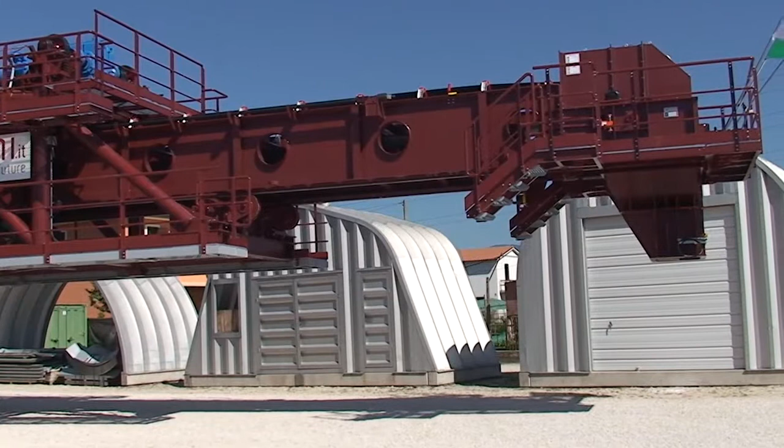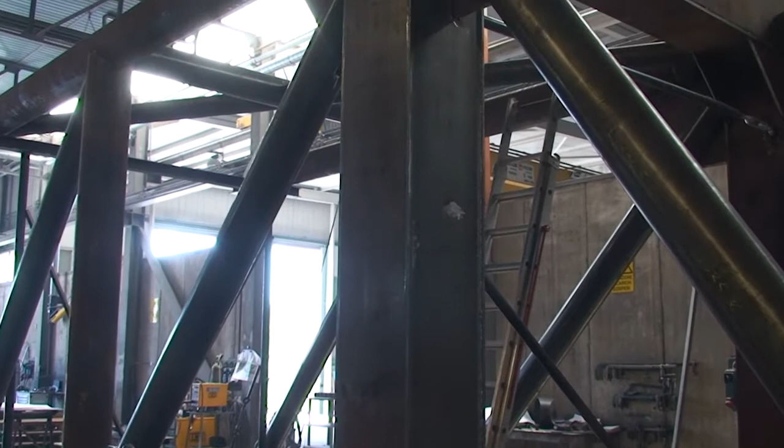Sammi's know-how can be seen in its ability of facing increasingly complex challenges, such as the Bulk Kremi project, created with Coeclerici Logistics and entirely designed and made by Sammi at its headquarters in Narni Scalo. The particularity of this plant is that of being the first in the world suitable for transshipment operations of bulk sulfur with conveyor belts.

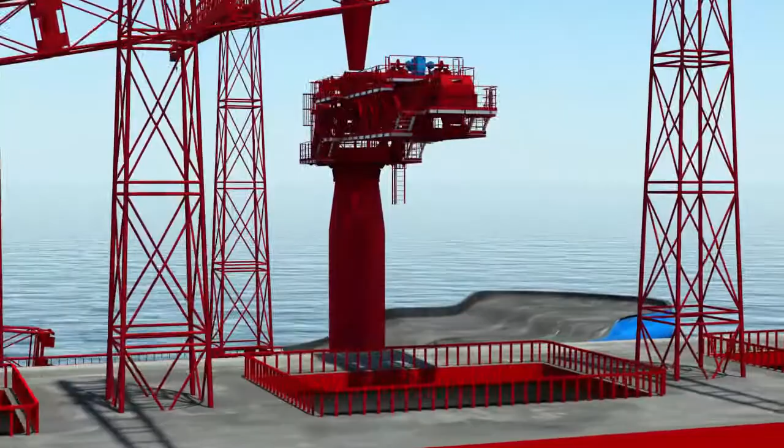The technological heart of the Bulk Kremi project is the innovative ship loader, the first of its kind able to carry out movements and performances which allowed the loading of any kind of ship, from small crane ships to Panamax, with significant reduction in transshipment times and respecting environmental regulations.

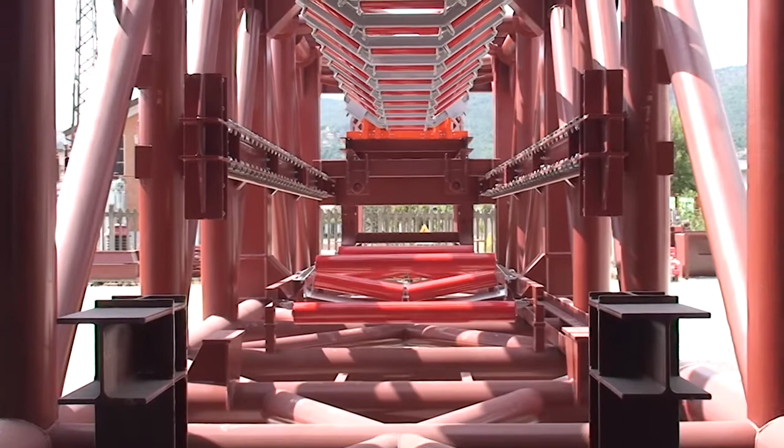The company's technical laboratory, in collaboration with specialized partner companies, engineered the entire mechanical, hydraulic and electrical parts of the plant. The ship loader in particular was analyzed in all its complexity, a unique machine of its kind that summarizes the high technological level the company has attained.

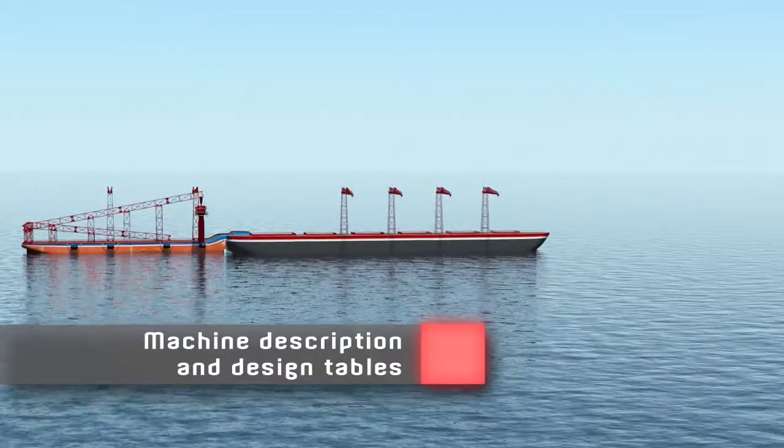The ship loader, or continuous loading machine of material transshipped directly to the hulls of bulk cargo carriers, ships that can transport non-liquid and non-unitarized loads in containers or pallets, is the heart as well as the jewel in the crown of a larger conveyor plant made by Sammi Limited to be installed on one of those commonly called OFTs, offshore floating terminal, ships or platforms used to transship material inside the merchant ships which carry to destination.

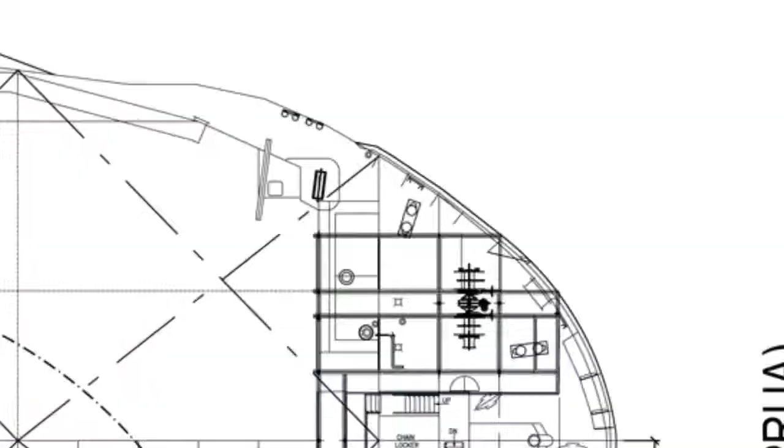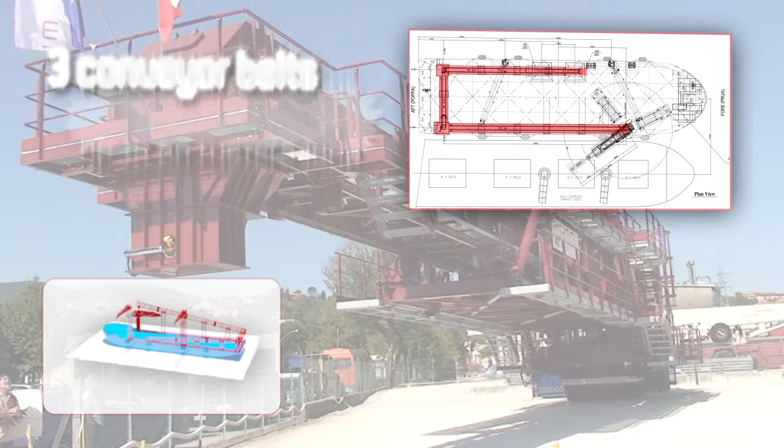The complete plant is made up of 2 loading hoppers, 2 extractor belts and 3 conveyor belts up to 60 meters long, and the ship loader. Credit goes to Sami to have entirely created, designed and built the plant at its workshop in Narni Scalo, from where it was then sent to its final destination in Ukraine.

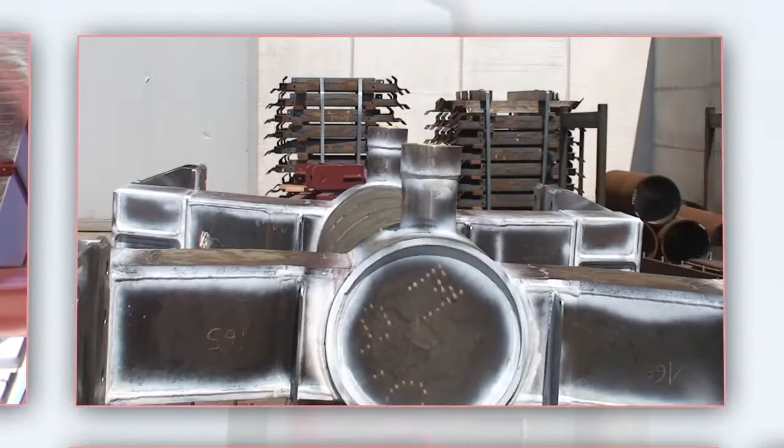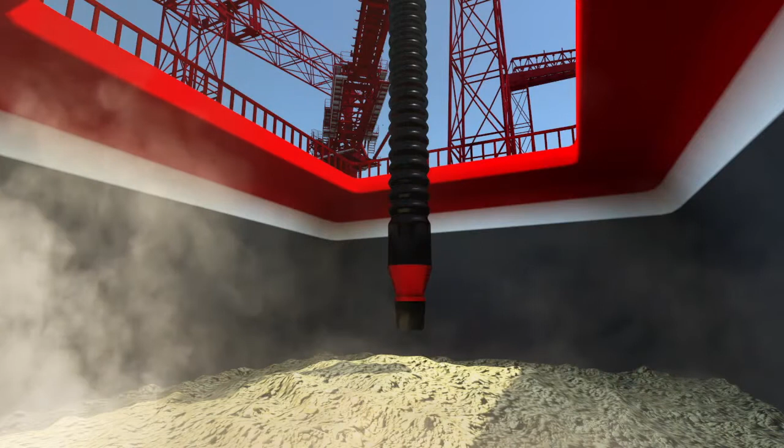What is special about this plant is that it is the first plant in the world suitable for the offshore transshipment of pelletized sulfur, a highly inflammable material due to its dusts, the installation of which comes under the European ATEX regulations. The ship loader, weighing a total of 100 tons, has 3 main functions, allowing it to reach any corner of the hulls of merchant ships up to 80,000 registered tons.

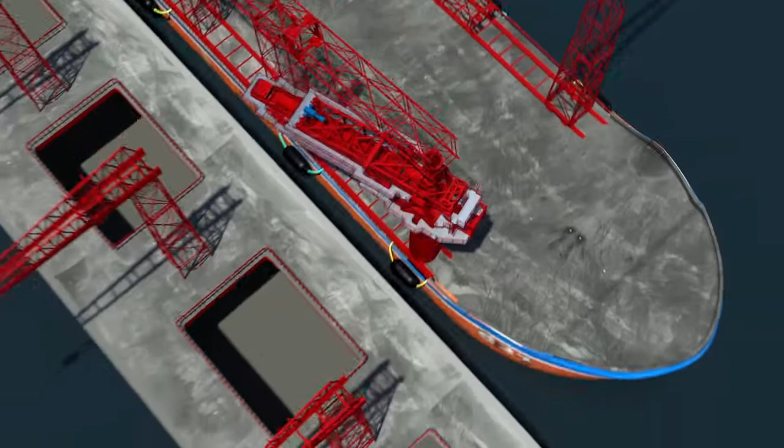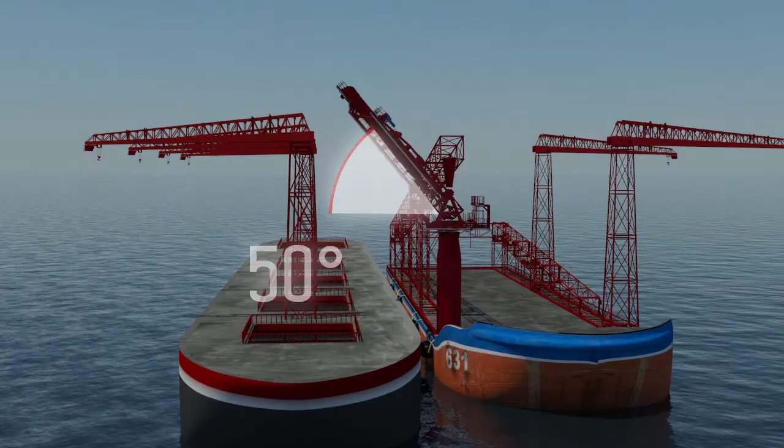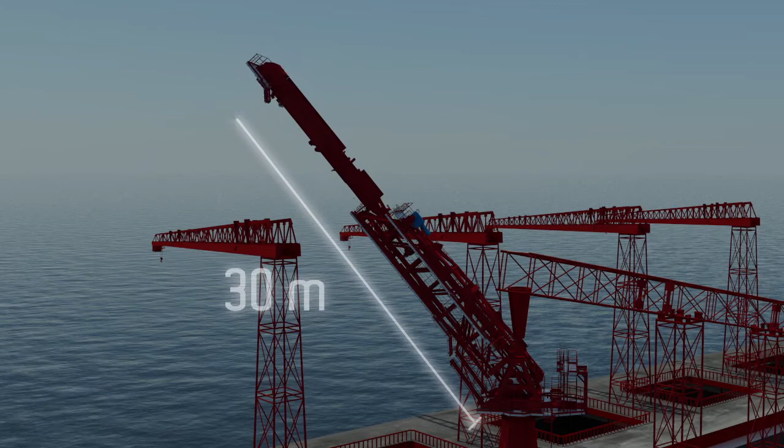It can rotate in plan as far as covering a 270 degree angle, lift its main jib to a maximum inclination of 50 degrees. This allows it to pass over the top of the ship masts in its loading during hold-changing operations, or extract its internal mobile structure as far as 30 meters approximately.

Thanks to these characteristics, material can be loaded in any part of the hold, thus optimizing the load and consequently the capacity and reducing loading times. Obviously, this leads to higher proceeds for the shipping company.

Special attention has been paid to limiting the plant's dust emissions, also according to explosive atmosphere regulations, by adopting a series of first-class international emission-reducing equipment.

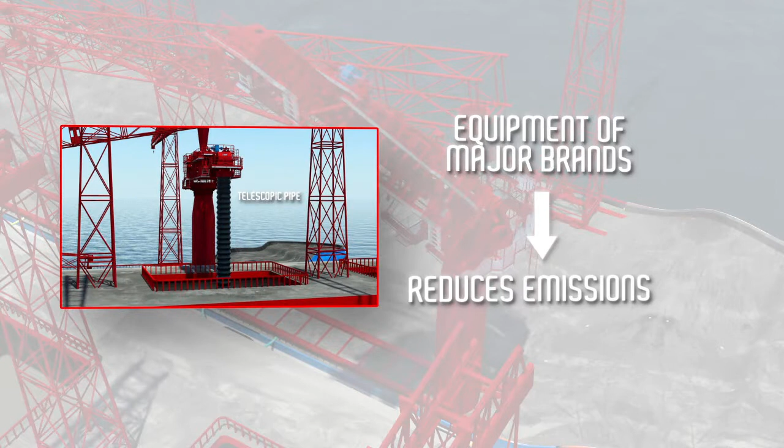Among these solutions, the adoption of a telescopic pipe on the terminal part of the ship loader is of utmost importance. Equipped with its own motorization and controls, it allows the material to be unloaded directly inside the holds, so it doesn't have to be dropped from a height superior to the main deck. Using this equipment significantly reduces dust emission, complying with the environmental regulations in force.

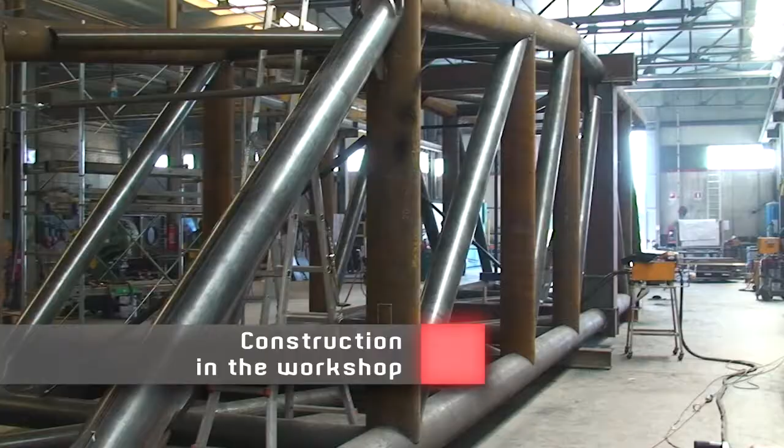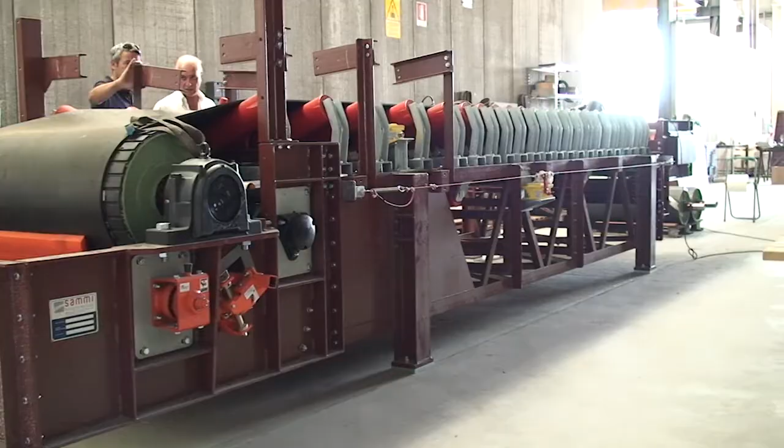All the construction phases and carpentry, included packing list, purchase of raw materials, preparation of semi-processed propedeutic elements for mechanical assembly, welding, pre-assembly, were carried out by skilled workers from Sammi, putting to good use the over 10-year experience in various technical works.

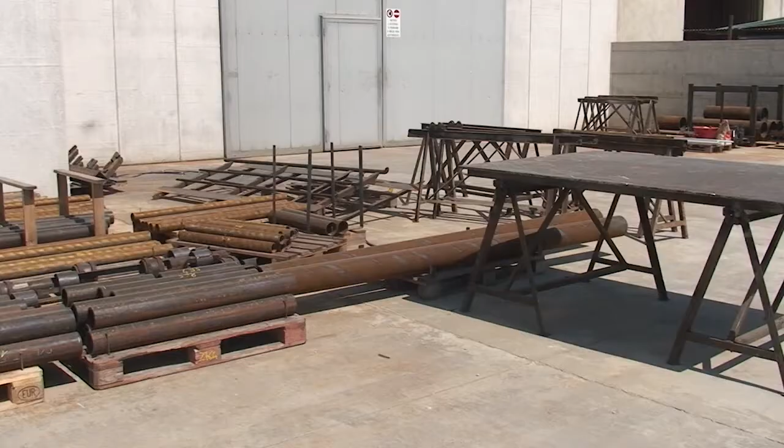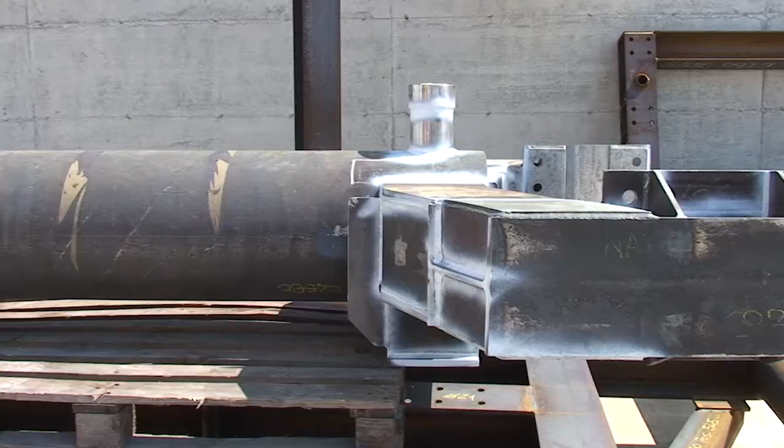Special attention was paid to the choice of very high-quality material of J0 and J2 standard, assuring low temperature resistance down to -20 degrees. The excellent quality of Sammi's technicians in the manual welding of tubiform grid joints gave a positive result in the non-destructive tests.

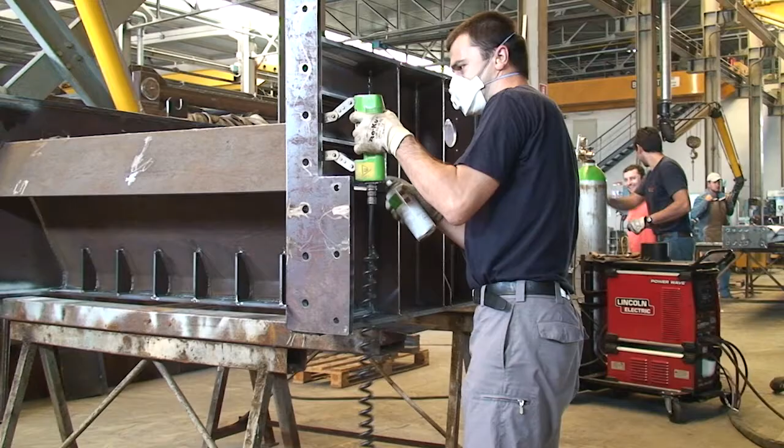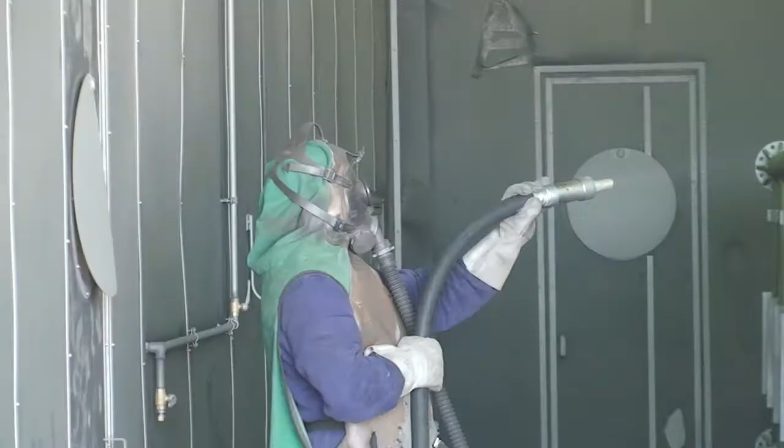The exceptional quality of the paint was obtained by special materials and various processing cycles, such as sandblasting, several coats of primer and color that generated a perfect enameling, rendering a long-term durability of the treated surfaces even in extreme conditions, such as those at sea.

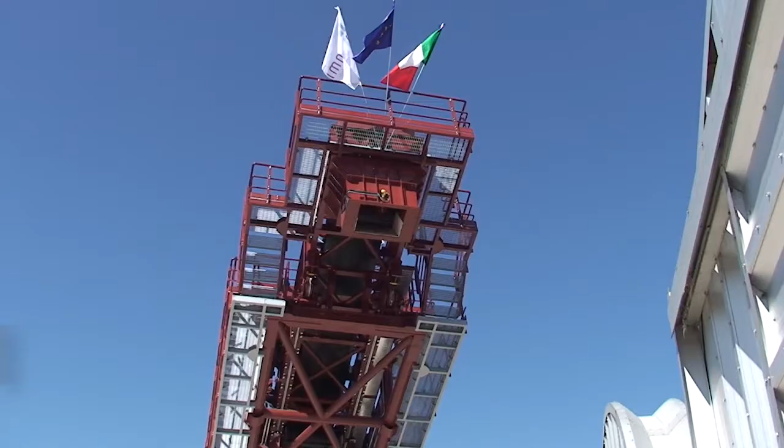Due to the complexity of the plant, a simulated installation was necessary in order to make sure the machine was in good working order.

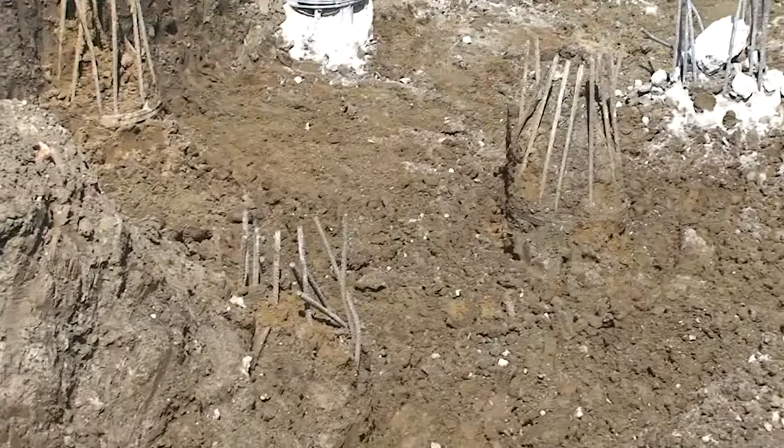A digging was carried out next to the workshops to make way for the enormous foundations in order to anchor the wheel element with suitable stays.

High-lifting power cranes were used in the next phase for housing the body of the ship loader on the wheel element, where it was then secured with huge kingpins to the hinges of the cylinder and immobile structure.

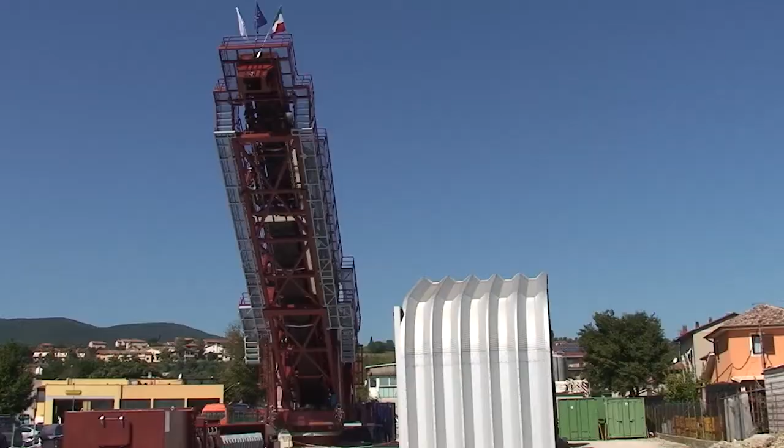An event day was then organized to test and show the huge manufacture to Clerici, the customer, and to the authorities and several local representatives.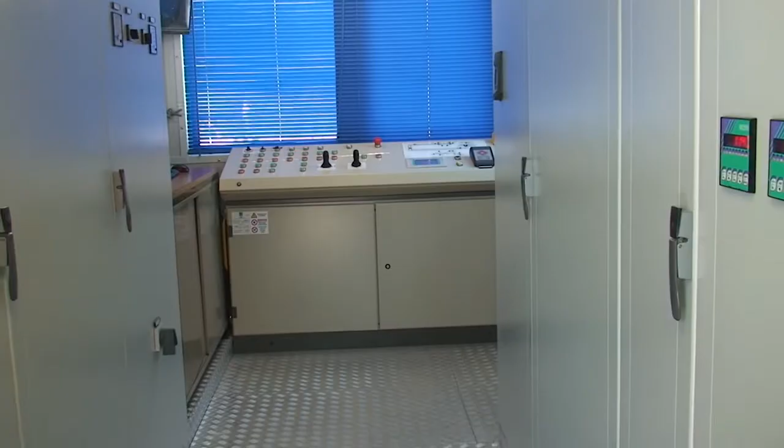The main functionalities at a cinematism level that the remote control ship loader is able to perform were presented. Also the electric control cabin with synoptic control and all the equipment to set the various technological components in motion and for monitoring the state of the plant were presented.

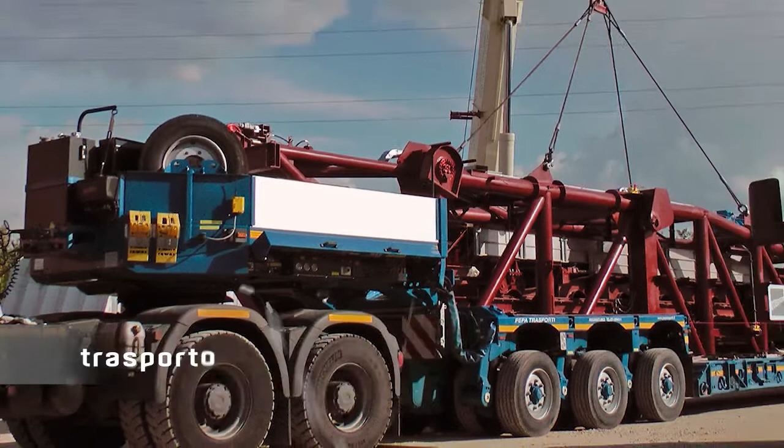No barriers exist, only new challenges. This is the slogan that Sami has adopted for this work. With its manufacture, the company's know-how was exalted increasingly, ranking it as protagonist on international markets.